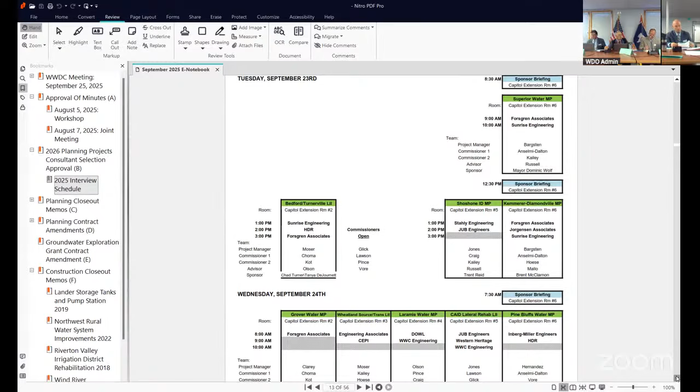Moving on to the Medicine Bow Water Master Plan. We have a motion for selection of the consultant. Mr. Chairman, Commissioner Lawson: the selection committee for the Medicine Bow Water Master Plan Level 1 project ranks the consulting firms interviewed in the following order: Sunrise Engineering, KL&A Incorporated, and the third one is Tri-Hydro. I, John Lawson, move the director to be instructed to begin contract negotiations with Sunrise Engineering for consulting services on the Medicine Bow Water Master Plan Level 1 project with a recommended appropriation of $174,000. Motion, do we have a second? Second. Motion made by Commissioner Lawson, seconded by Commissioner Glick. All in favor? Aye. Opposed?

Motion passes. Pine Bluffs Water Master Plan. We have a motion for a selection of consultant.

Mr. Chairman, the selection committee for the Pine Bluffs Water Master Plan Level 1 project ranks the consulting firms interviewed in the following order: HDR 1, IME 2. I, Ron Vore, move the director be instructed to begin contract negotiations with HDR for consulting services on the Pine Bluffs Water Master Plan Level 1 project with a recommended appropriation of $169,000.

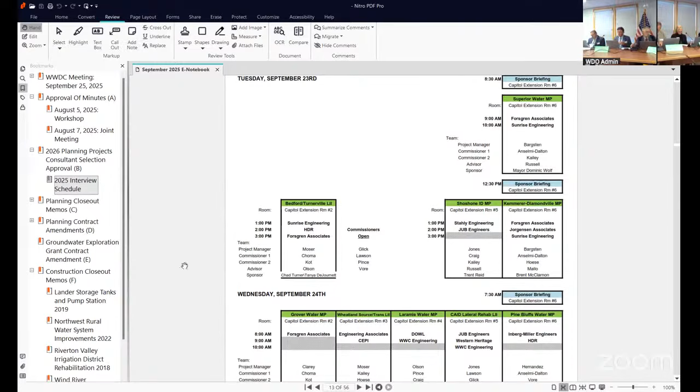Motion by Commissioner Vore, second by Commissioner Glick. All in favor? Aye. Opposed? That covers our consultant selection portion of the meeting. I'll turn it over to Director Mead.

Thank you, Mr. Chairman. Before we move on, I just want to express my appreciation to all the consulting firms that put in this year. Unfortunately, we can't give contracts to everybody, but it is a significant investment for those folks putting together proposals and preparing for interviews, so we do appreciate that. We've got a good group of good consultants in the state of Wyoming, so just want to express my appreciation for that.

Next agenda item is planning closeout memos. First one being Bairoil Master Plan, and we've got Keith Clarey to provide that for us.

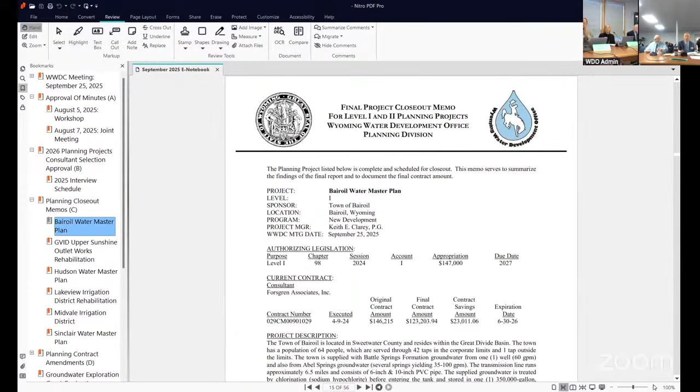Water Master Plan, level one study for the town of Bairoil, had an appropriation of $147,000. The original contract was $146,215. The final contract amount was $123,203.94. The contract savings amount was $23,011.06.

Town of Bairoil resides in Sweetwater County in the Great Divide Basin. It has a population of 64 with 43 taps. The system has springs about 6.5 miles northwest, which is their primary source of water. It gravity flows to town through a 6.5 mile pipeline, and it's treated for chlorine just before it enters the tank, a 350,000 gallon tank, which then supplies water to the town.

There's also a well northwest of the springs that they use occasionally, as a backup for the summer. In the wintertime, with the snow, both the springs and the well are inaccessible pretty much, depending on how much snow is up there.

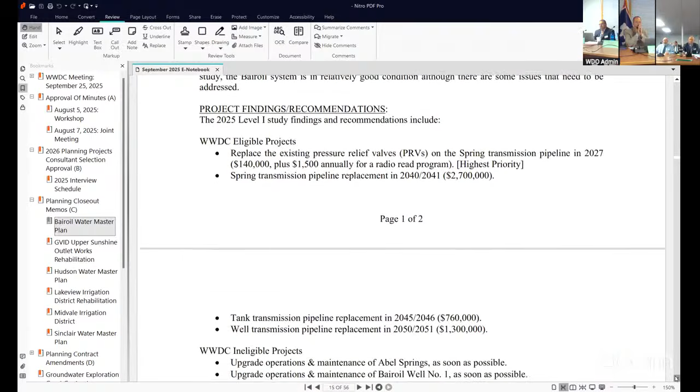The findings and recommendations for this master plan include a few items for eligible WWDC projects. The first and highest priority is replacing the pressure relief valves along the 6.5 mile pipeline, for a cost of about $140,000.

Beyond that, there's the spring transmission line, the tank transmission line, and the well transmission line, with prices ranging from $2.5 to $2.7 million for the spring transmission pipeline replacement in 2040 to 2041.

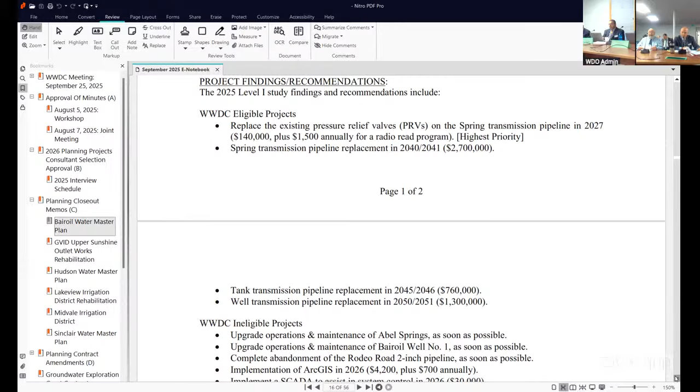The next item is the tank transmission line, at $760,000 in 2045-2046. Then a well transmission pipeline replacement in 2050-2051 for 1.3 million in today's dollars, but who knows what it will be in 2050.

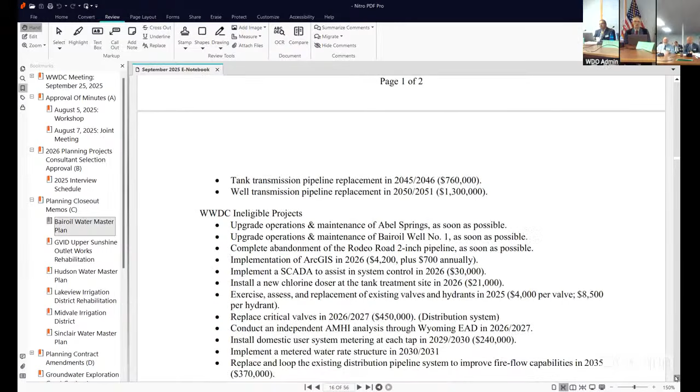There are also a dozen or so recommended projects not eligible for WWDC funding, primarily dealing with in-town distribution system items, and some operation and maintenance that needs to be critically taken care of. There's a public presentation on April 2nd at the Bairoil Town Hall.

The WWDO recommends acceptance of the final report submittals and closing the consultant services contract. The WWDO further recommends proceeding to the next level of project development upon submittal of an appropriate funding application by the sponsor. The town of Bairoil has not applied for additional WWDC funding at this time, but intends to apply sometime in the future for the selected alternatives.

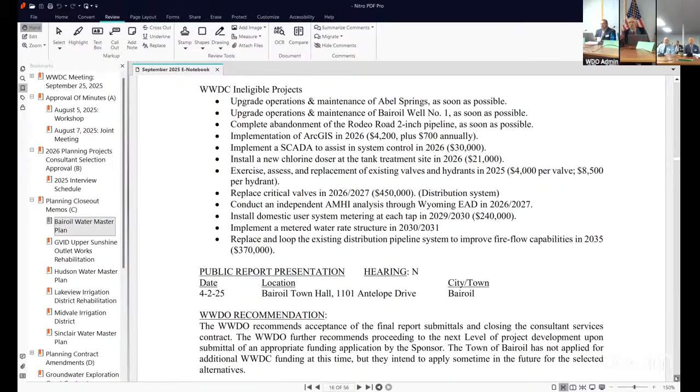Thank you, Keith. Anyone have any questions? This does not require commission action, is that correct?

Mr. Chairman, there is a motion. It does require commission action. At the end of each project closeout, there's a suggested motion for the commission.

Okay, Chairman, Commissioner Glick. I'd like to make a motion. I move acceptance of the Bairoil Water Master Plan Level 1 Study Project Report as being complete, and further, the Wyoming Water Development Commission makes the following findings relative to the project: that the commission recommend proceeding to the next level of project development upon the submittal of an appropriate funding application by the sponsor. We have a motion.

We have a second. Motion by Commissioner Glick, second by Commissioner Prince. All in favor? Aye. Opposed? Thank you, Keith. Thank you, Mr. Chairman.

Okay, Mr. Chairman, the next closeout memo is for the Greybull Valley Irrigation District Upper Sunshine Outlet Works Rehab, and we have Jennifer Russell from our construction department here to present that. Welcome, Jennifer. Morning. As Jason mentioned, I'm here to present the closeout memo for the Greybull Valley Upper Sunshine Outlet Works Rehab Level 2 study.

This was an appropriation from the 2023 session. It took a little more time than most projects due to the nature of the field work needed. The original contract amount was $620,828 and some cents. The final contract amount was $464,794.92, for a savings of a little over $156,000, which was a savings of about 25%.

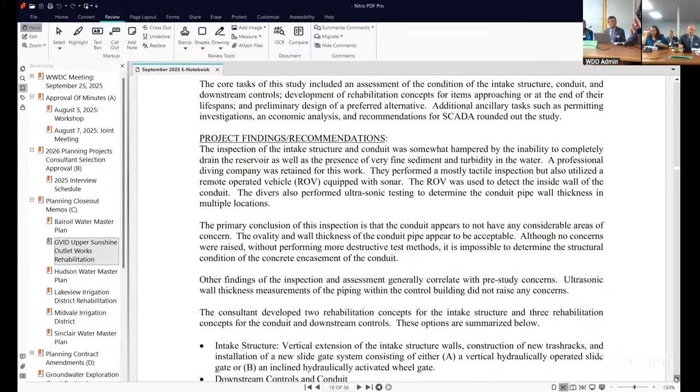Our recommendation is to accept the study that was done. We did have a public hearing. There was no opposition, and it was determined that the project functions and services cannot realistically be provided by any person, association, or corporation engaged in private enterprise. Therefore, we recommend proceeding to the next level of project development upon submittal of an appropriate funding application by the sponsor.

Mr. Chairman and Director, and so Jennifer, I hate to do this, but I have some concerns about this project.

First of all, I'd like to know, how many users are served by this and how many acres? I mean, we start at 2.6 million and then we get up to possibly 16 million. The last project, I kind of voted a soft no, just because in Bairoil, it's $93,750 potentially per person that lives there. We're getting to costs that are outrageous. At what point does it really serve the public interest is my question.

So maybe Jennifer, the director, or someone knows how many users, how many acre feet are stored. If we drain the dam, it's a big issue with Fontenelle, about the fish and wildlife, on and on we go. I'm just asking, this seems to be a pretty big merry-go-round we're getting on.

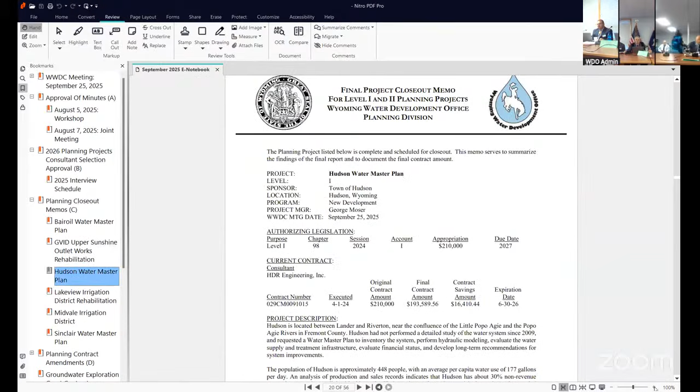Thank you, Mr. Chairman. The next project closeout is for the Hudson Water Master Plan. I'd invite George Moser up. Welcome, George. Good morning, Mr. Chair. Thank you. George Moser with the Water Development Office Planning Division. Today, for your consideration, is closing out a project for the Hudson Water Master Plan.

A memo summarizing that can be found on page 20 of your e-notebook PDF. This is a water master plan that was funded by the 2024 legislative session with an appropriation of $210,000. HDR Engineering was selected to perform the consulting services, and after final billing, we ended up with a project cost savings of about $16,400.

For those of you that don't know, Hudson is located just approximately between Lander and Riverton, kind of at the confluence of the Little Popo Agie and the Popo Agie, and they really had not had a study to look at much of their critical infrastructure in their system since about 2009. They have a population of a little less than 500 people. Average per capita water use floats in the high, 177 gallons per day per person.

Through the course of the study, we identified that they had about 30% non-revenue water. The reason I'm saying non-revenue is that probably fits into two different categories for Hudson. There's probably some actual leaks, but there's also some aging meters. The water that's actually being delivered just can't be accounted for and sold.

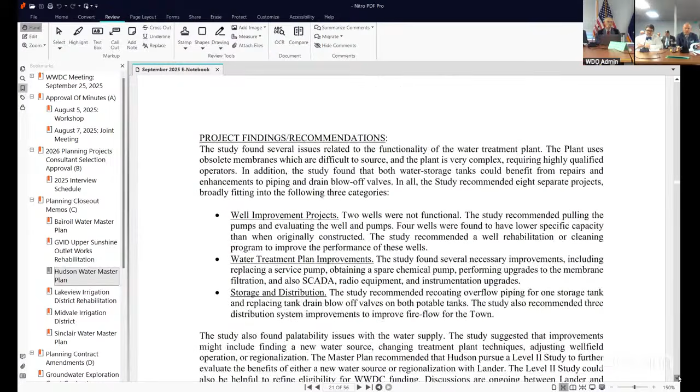The study really found several issues related to functionality of the water treatment plant, keeping in mind that under a level 1 water master plan, we can look at certain components of the water treatment. It may not be something ultimately that's eligible for funding or assistance on the construction side when we get there, but we do take a cursory look at those things.

One of the big things for their treatment plan is that it's really complex, and they do have proprietary membranes. So sourcing those membranes can be a problem for them. It takes a couple month delay. They've got to get them out of a manufacturer in Europe.

So one of the recommendations is, of course, to move to something more generic for them. Also, they have some corrosion of some valving in their water storage tanks, which is things that just as an O&M process they could upgrade and repair. So the study really identified 8 different projects of priority for Hudson. For your thoughts, I could put those into 3 broad categories.

Well improvement projects. They have a couple of wells that don't appear to be performing really at all. So the recommendation is to hire a pump servicing company to come in and take a look at those, see if they need to be rebuilt or replace what needs to happen there in order to improve the functionality. Also probably look at rehabilitating some of those wells. We noticed during measuring water level changes during pump cycles that some of those wells are not as efficient as they were when they were originally completed. So probably think about some rehabilitation techniques on some of those to improve their performance.

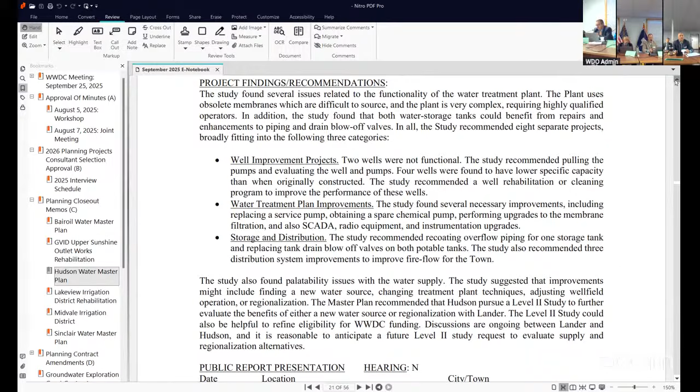We have a motion. Do I have a second? Second. Motion by Commissioner Glick, second by Commissioner Choma. All in favor? Aye. Opposed? Motion passes. Thank you.

Mr. Chairman, I might also mention too, we just started the Middle Popo Agie Level 2 feasibility study looking at potential for more storage up in the Middle Popo Agie drainage, and that the, I guess, regionalization concept is also being thought about in that study as well, because we're looking for late season supplemental irrigation water, but also potential future water use needs from the municipalities of mainly Lander.

But as George mentioned from that master plan, there's been some thought given to what areas of either Lander that are kind of rural sprawl or these close towns nearby that could be brought in the regional system. So hopefully we'll be able to provide some additional information if they come in the spring for a level 2 feasibility study.

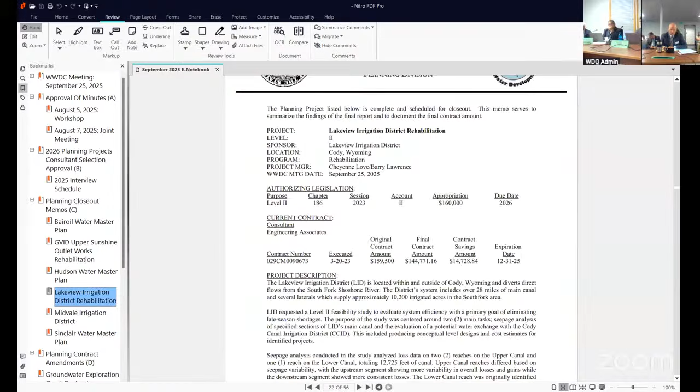All right, so the next closeout memo is the Lakeview Irrigation District Rehab Level 2 study, and we have Cheyenne Love to present that.

You have to push it. I press it. Okay, we are on page 22.

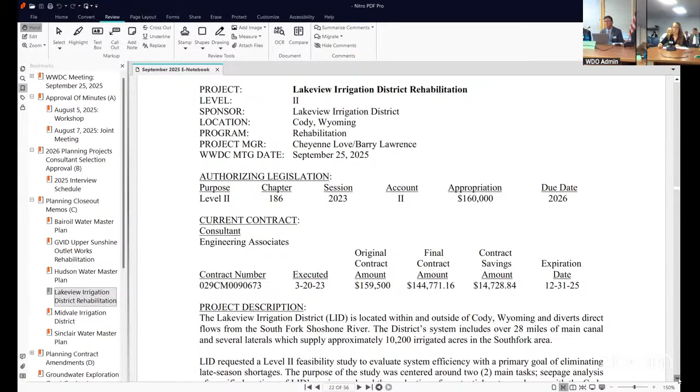The appropriation for this project was $160,000 under the 2023 legislative session. Consultant was Engineering Associates. The contract amount was $159,500. Following the final pay request, the contract savings was $14,728.84.

The main goal of this study was to evaluate system efficiency with the primary goal of eliminating late season shortages within the Lakeview Irrigation District. That was completed under two main tasks: a seepage analysis and analyzing potential for water exchange with the Cody Canal Irrigation District. The seepage analysis was conducted on two reaches on the upper canal and one reach on the lower canal, all showing differing variability in the seepage loss.

Multiple conveyance routing alternatives were considered as options for that water exchange with Cody Canal. The Coons lateral was identified as being the most feasible, however the consultant acknowledged there would be pretty high infrastructure costs associated in developing that lateral for exchange purposes. So this study looked at multiple improvement options to address the seepage loss within those focus areas, those reaches identified, as well as assessing the feasibility for that interdistrict water exchange between Lakeview and Cody Canal.

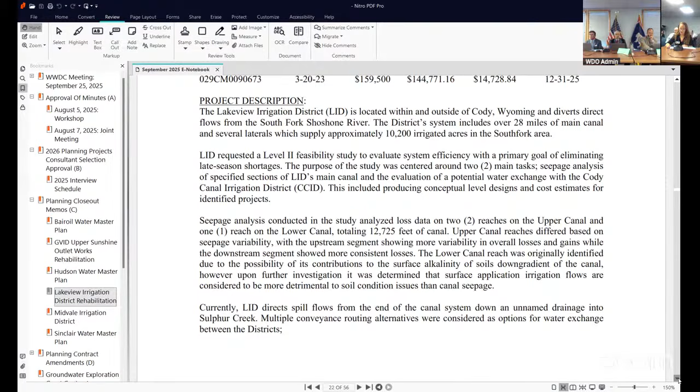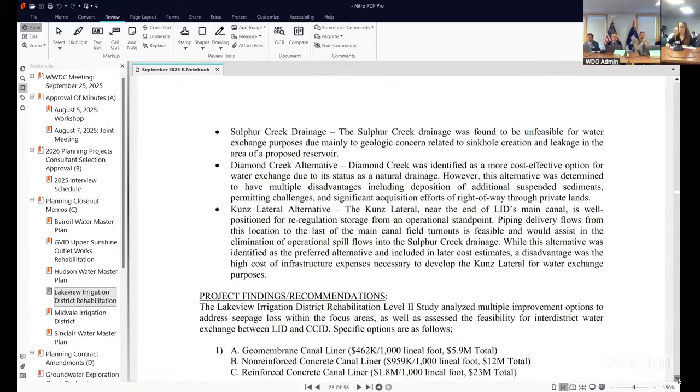The options considered were as follows: geomembrane canal liner, non-reinforced concrete canal liner, and reinforced concrete canal liners, all with differing costs associated with lining those seepage areas. Also the exchange storage and pipeline, which was identified as the Kunz lateral. That cost total is for the Kunz lateral alternative.

There was a public hearing held on July 14th at the Park County Library in Cody. The recommendation from the office is acceptance of the final report submittals and closing of the consultant services contract. On the bottom of that second page, there's a motion for your consideration, and I'd be happy to stand for any questions.

Hearing none, can we have a motion? Commissioner Glick? I'd like to make the motion. Oh, hold on, my card fell. Gotta make sure everybody knows who I am.

The Lakeview Irrigation District Rehabilitation Level 2 study analyzed multiple improvement options to address seepage loss within the focus areas, as well as assess the feasibility for interdistrict water exchange between LID and CCID. Specific options are as follows.

Mr. Chairman, Director, you might be reading the wrong part. Yep, I am reading wrong. Okay, right, sorry, give me a break.

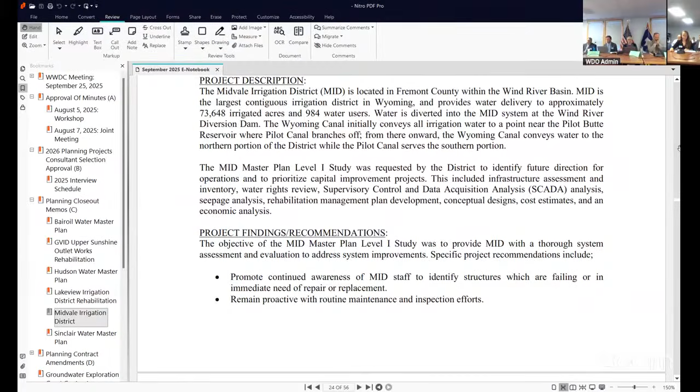The appropriation for this project was $409,000. Consultant was Tri-Hydro Corporation. Contract amount was again $409,000. Following the final pay request, the savings for that project was $44.28. The study goals were to identify the future direction for operations for the Midvale Irrigation District and prioritize capital improvement projects. This included inventory, SCADA analysis, the rehab and management plan, and then cost estimates.

Recommendations under this study primarily focused on the district remaining proactive in project implementation. They're pretty active with that in between these master plans, so they mainly boiled down to keeping that going. The specific projects could be placed under four categories, which you can see there.

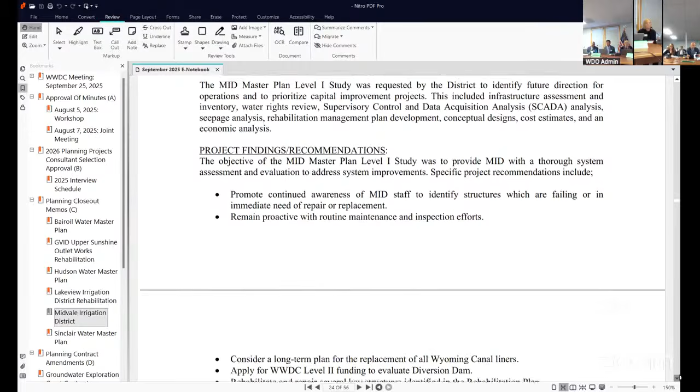Structure, rehabilitation, and replacement components. There were 50 structures identified for replacement or rehab under this study, totaling close to $28 million.

SCADA improvement components: there were 16 existing site and 4 new site SCADA improvements identified, for about $562,000. Canal and lateral improvement components: 9 ditch-to-pipe conversion projects and 4 canal lining projects were identified for rehab.

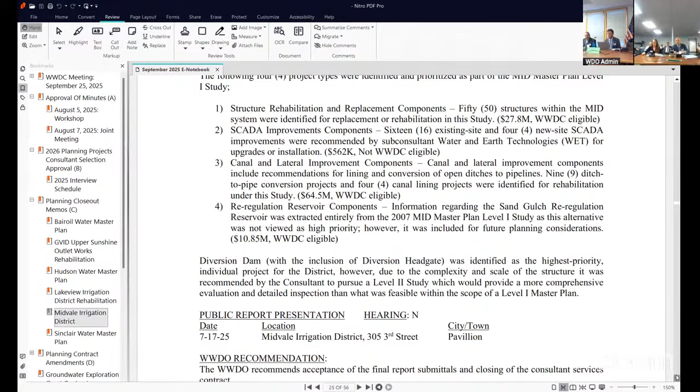Totaling almost $65 million. Then the re-regulation reservoir component: the Sand Gulch re-regulation reservoir was mainly looked at, extrapolated out from the 2007 study that was conducted for Midvale.

The district wasn't looking to pursue that at this point in time, but they wanted to keep the option on the table in case they wanted to look at that in the future. Extrapolated out to 2025 costs, Tri-Hydro estimated that at almost $11 million.

The diversion dam, with the inclusion of diversion headgate, was identified as the highest priority individual project for the district. But due to the complexity and scale of that structure, it was the recommendation of the consultant for the district to pursue a level 2 study for diversion dams specifically, which I think the district is interested in and will be looking at pursuing that work in the near future.

There was a public report presentation, not a hearing, on July 17th at Midvale Irrigation District. The recommendation is to approve acceptance of final report submittals and closing of the consultant services contract. There's a proposed motion for your consideration, and I'd stand for any questions.

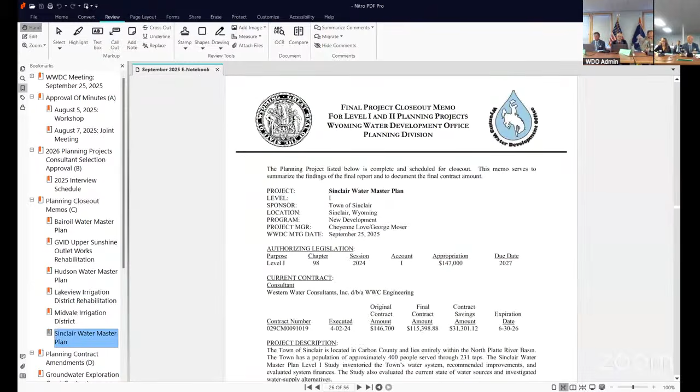Okay, great, so last closeout memo from me this morning. Director Meade said this is for the Sinclair Water Master Plan Level 1 study. This can be found on page 26 of the e-notebook. The town of Sinclair serves approximately 400 people through 231 taps.

The town receives treated water supplied by the city of Rawlins under a joint powers agreement that was entered into in 2002. The system consists of a 500,000 gallon storage tank supplying one distribution pressure zone.

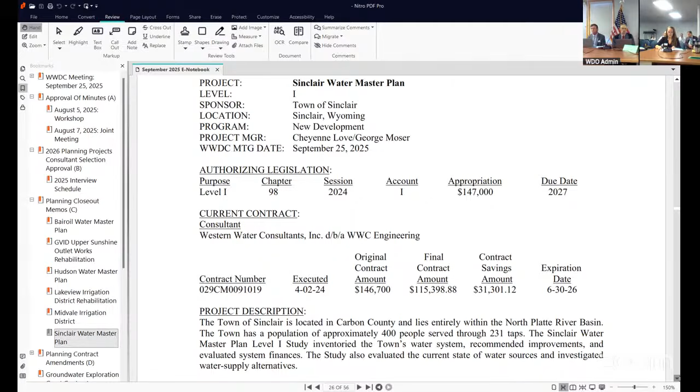The appropriation for this project was $147,000. The consultant selected was Western Water Consultants Incorporated. Contract amount was $146,700. Following the final pay request, the savings was $31,301.12.

The study's goals were to inventory the town system, recommend improvements, and evaluate system finances. This included evaluating the current state of water sources and then investigating water supply alternatives for the town.

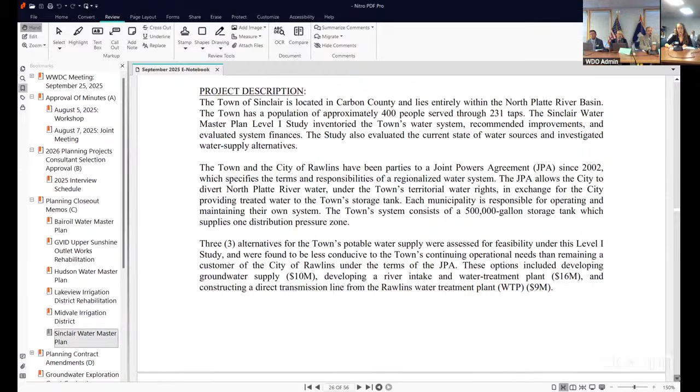Those water supply alternatives under this study were determined to be the development of a groundwater supply for the town at about $10 million, the development of a river supply, which would include an intake and a new water treatment plant at $16 million, and the third being construction of a direct transmission line from the Rawlins water treatment plant back to the town, which was the lowest cost at $9 million.

However, it was recommended by the consultant that the most cost-effective and feasible option for the town would be to remain a customer of the city of Rawlins in the water exchange.

There was an acoustic leak survey conducted. Only one isolated suspected leak was found on the water main, and that was included under the project recommendations for the town. The hydraulic model showed that the town was compliant with regulations and fire flows, but there are water age concerns regarding the storage tank and the water held there.

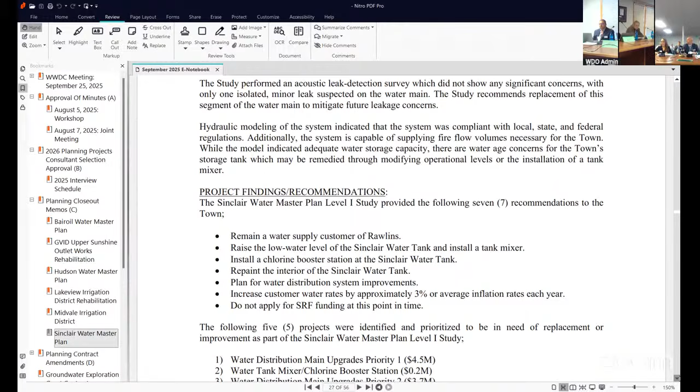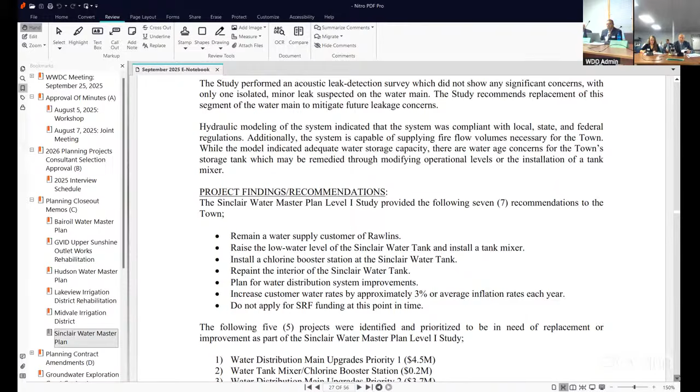So the projects for replacement and improvement were the five you can see there: water main upgrades priority 1, which included the segment where the small leak was detected, and a water tank mixer and chlorine booster station, which were meant to help with the water age concerns in the town.

Water main upgrades priority 2 addressed another segment of Sinclair's water mains identified as needing upgrade, along with a water tank repaint and a water meter replacement.

The total project cost for all of those together is roughly $9 million, and they're not considered WWDC eligible, so that would require outside funding sources, which the consultant helped the town identify.

There was a public report presentation on July 9th at Sinclair Town Hall. The recommendation is to accept the final report submittals and close the contract. There's a proposed motion for your consideration, and I would be happy to stand for any questions. Anyone have any questions?

We have a motion. Mr. Chairman, Commissioner Choma: I move acceptance of the Sinclair Water Master Plan Level 1 Study Project Report as being complete, and further, the WWDC makes the following findings relative to this project: that the commission recommend terminating further consideration of the proposed project. Do we have a second?

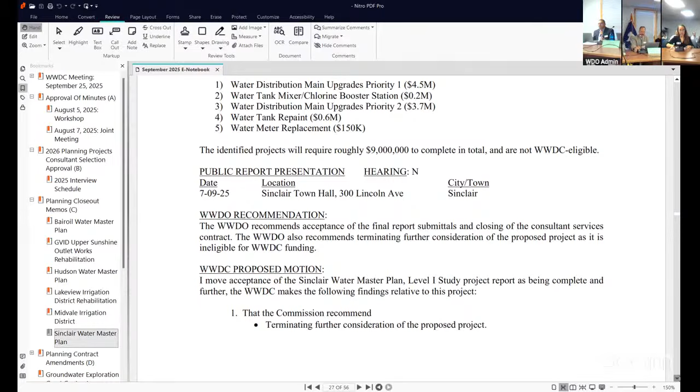Motion by Commissioner Choma, second by Commissioner Lawson. All in favor? Aye. Opposed? Motion passes. Thank you.

All right, thank you, Mr. Chairman. The next item is planning contract amendments. The first one is Clear Creek Storage Level 2 Phase 2.

This is amendment number 9 to the contract with Stantec Consulting Services. We're basically looking to extend this by an additional 6 months. This project's been languishing for some time. It is a fairly expensive project.

The Upper Bull Creek Reservoir site has been identified as a preferred alternative moving forward, but it's a $100+ million project.

Several years ago, we were hopeful that some of the Water Resource Development Act language was going to lend itself to the state of Wyoming being able to get some federal funds for reservoirs. That passed, but no funding was ever put in place for that particular program through the Corps of Engineers.

So with the new administration and some of the funding we've used on other projects, NRCS watershed and flood prevention operations might be an opportunity.

And I think there's some things with the new administration coming out on how much more funding will be coming into those programs. So really just wanting a little bit of additional time, wanting to wrap this up, but to understand what other funding sources are out there, circle back with the potential beneficiaries and future sponsors, and put a bow on this thing and figure out how we're going to move forward, what's feasible, and who's going to be the group that's going to move forward with it if they so choose.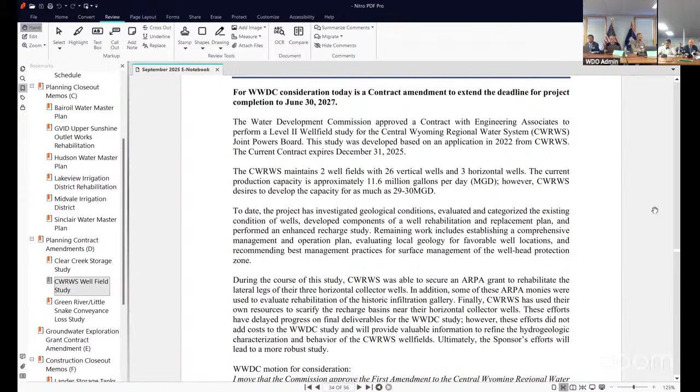So what we are proposing today is to extend the current contract. It currently expires December 31st, 2025. We would like to add a couple of years to that. June 30th, 2027 is what we are proposing. And if there are any specific questions for the sponsor, I believe Ethan Yonker is online. The consultant for this planning project is Engineering Associates, and Dave Engels is the project manager. I believe he is also online. I suspect between the three of us, we could try to answer any question that the commission might have.

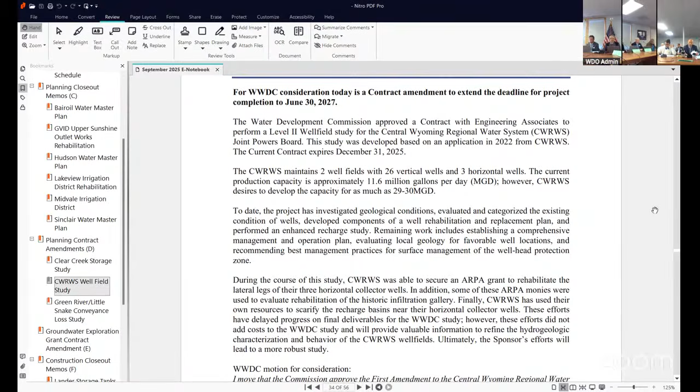If you are interested, there is a proposed motion on the bottom of the memo page on page 34. Anyone have any questions? We have a motion.

Mr. Chair. Mr. Cayley. I move that the commission approve the First Amendment to the Central Wyoming Regional Water System Wellfield Level 2 study to extend the contract to June 30th, 2027.

Motion by Commissioner Cayley, second by Commissioner Anselmi Dalton. All in favor? Opposed? Motion passes.

Thank you, Mr. Chairman. The third and last planning amendment would be on the Green River, Little Snake River Basin's conveyance loss study. I'd ask Chase to come up and give a brief explanation on that.

Mr. Chair, Commission, good morning. This amendment is an extension of time from December 31st, 2025 to December 31st of 2026. The original schedule was expedited, and a big piece of the conveyance loss study is the measurement of flows upstream and downstream in a canal to determine the conveyance losses through seepage, for example. It was an unanticipated difficult time to get landowner participation and access to find ditches throughout the Green River Basin that were representative of the basin.

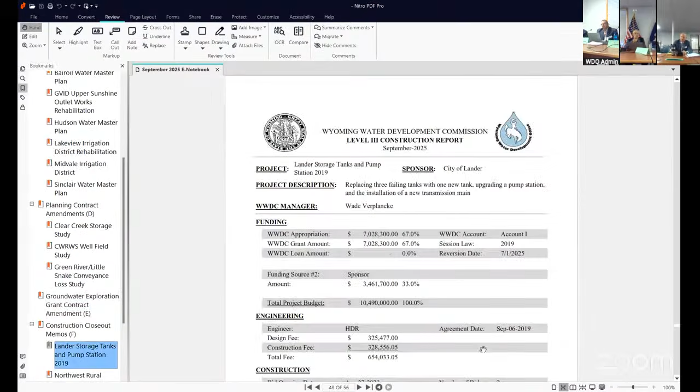Chairman, Commission, Bill Brewer, Deputy Director of Construction, here with some closeout memos. We're going to be coming forward to you a bunch with closeout memos as we're getting some construction projects finished up, and some of these are fairly old ones that we're wrapping up.

Post-COVID, we had a really good period for a short time where we got some incredible bids, and then our bids went ridiculous and we postponed a lot of projects. But we're moving along. This summer has been very busy for the construction staff, with multiple projects being awarded this year and moving forward to close out.

So let's get started. The first project here is the Lander Storage Tanks and Pump Station, for the city of Lander. Basically this project replaced 3 failing tanks with 1 new large tank and upgraded their pump station and installed a new transmission main to make this whole system work within their system.

This was originally a 67% grant project because this is from 2019, with the sponsor covering 33% of the costs. The engineering firm hired was HDR. They came in a little over $654,000 to complete the engineering and construction management on this project.

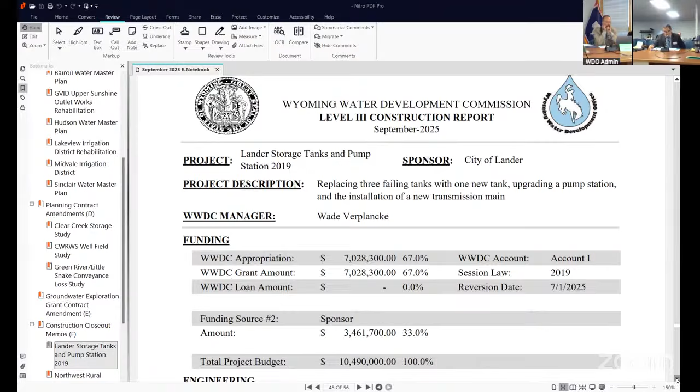Just shy of 6.8 million came from the commission, and we'll be looking at reverting just under $229,000 to account one from this project. So overall, the project was kind of slow and delayed, but in the end ended up being a good project, coming in slightly under budget.

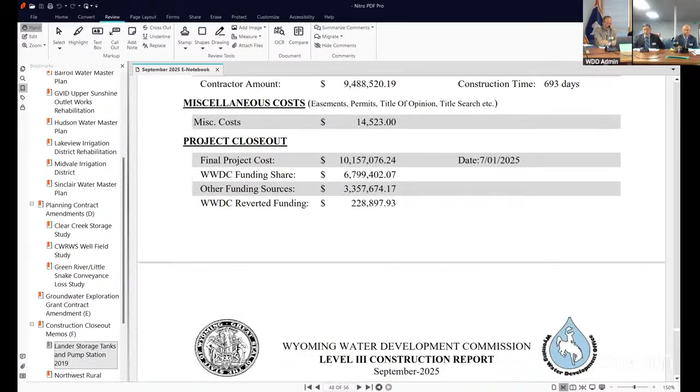Any questions on Lander? Have any questions for Bill on this, Chairman? Commissioner Lick?

Thanks, Bill, for all your help on that. I just want to give everybody a little information. Back when we were trying to get this project started, the roof on the old tanks was getting ready to fail and cave in. We had a bad winter, it was going to cave in, but luckily it didn't. We had a fairly mild winter, which really helped us out.

The tanks and water line improvement for the pumping station was really critical for our area, because this is where our hospital gets its water. And if the tank had failed, we would have been out of hospital service or anything else. So just thanks to everybody. Thank you.

Thank you, Commissioner. Anyone else have any questions or comments for Bill?

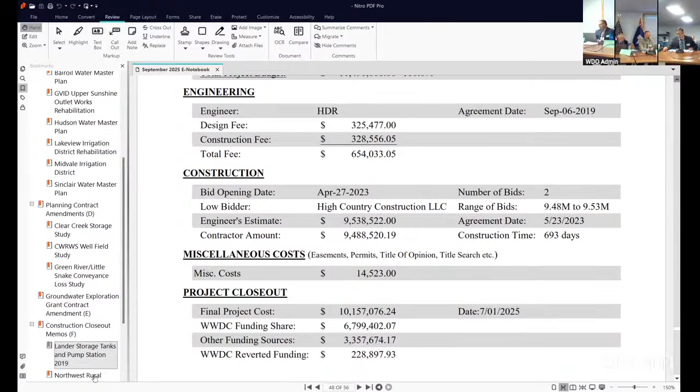Okay, thank you, Bill. So we'll move on to the Northwest Rural Water System Improvements 2022 project. This was for the Northwest Rural Water District, and it was a tank installation. Essentially, this installed 3 smaller tanks to the system to aid flows within a portion of the system.

Northwest Rural Water has been doing this throughout their system, where they install these small tanks in certain areas because there's such a large area up there that they cover. They strategically place smaller tanks in different areas to make sure the flow works within their system. So this one was completed. The original appropriation on this project was...

$884,400 at a 67% grant, and this was also account one funds. In the end, the cost of this project did go up. However, the sponsor received a second appropriation from sponsor's contingency funds.

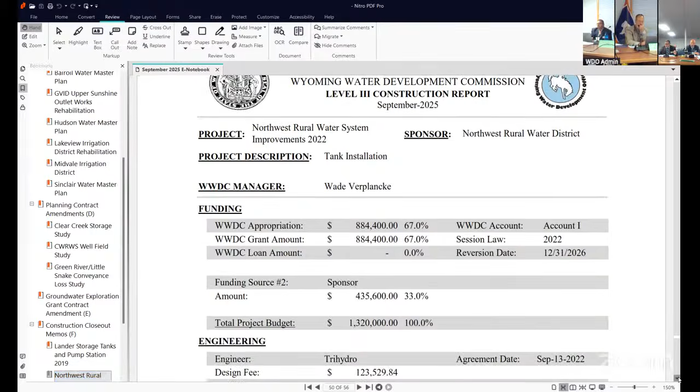So the original, I should go back - the original legislation was a little over 700,000. There was an additional 184,000 of sponsor's contingency funds added, and the sponsor also received some ARPA funds through the SLIB office. So in the end, this project ended up about 53% funded from water development and about 46.8% funded by other funds.

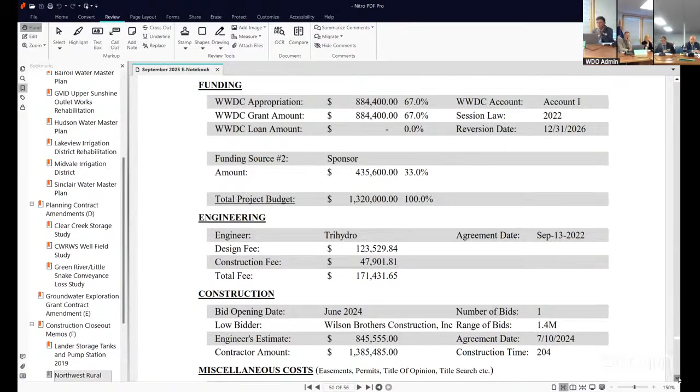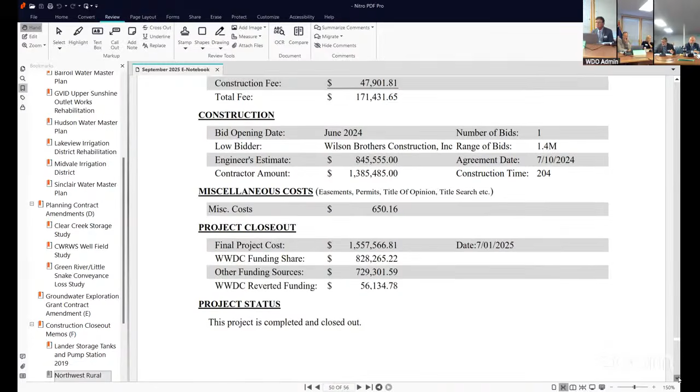Trihydro was the engineer, their total fees came in about $171,000 for their work. Wilson Brothers Construction was the ultimate winner. Again, only one bid was received, which is partially the reason for the increased cost on this project.

So the contract amount was above the engineer's original estimate, and that was covered by both sponsor's contingency funds and ARPA funds through SLIB. In the end, the total project ended up at $1.56 million. WWDC's share was a little over $828,000, representing 53.2% of the project. In the end, we'll be reverting about $56,000 to account one sponsor's contingency funds.

Thank you, Bill. Anyone have any questions for Bill?

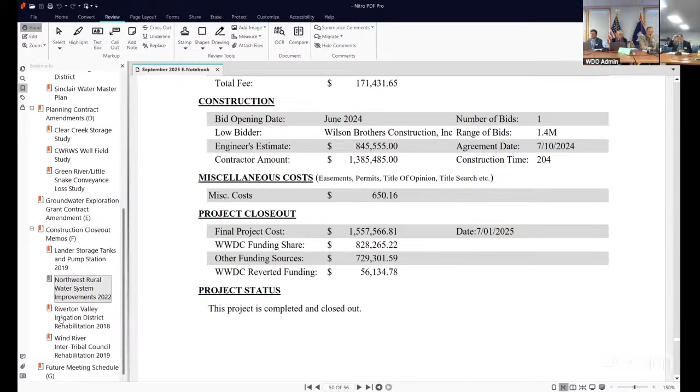Okay, go ahead and move on. Good, thank you. So we're going to move on to the Riverton Valley Irrigation District Rehab 2018 project.

This was rehab work done due to a flood that occurred and basically took out one of their large canals, with some disturbance along the river. This project was a 25% grant, matching federal funds of 75%, to do some rehab work on the canal and some vegetation and erosion control features following that flood. So a little different project than we would normally run.

Sage Civil Engineering was the engineer for the project. Their final costs were a little over $126,000.

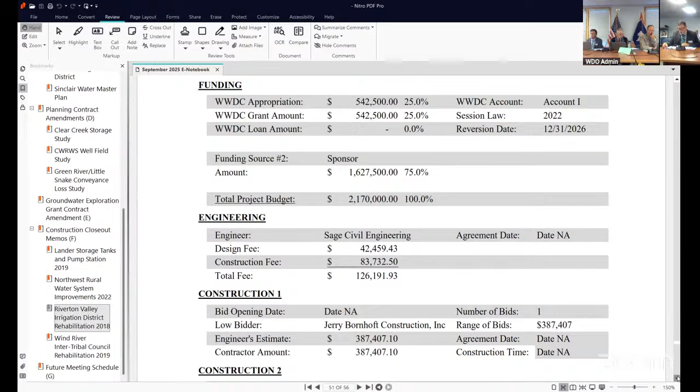We had 3 different portions of the construction project completed, and we didn't have a real good engineer's estimate on those. They basically just went out to bid for the different portions that needed to be repaired. So it shows up kind of that the engineer's estimate and the cost was the same, because there was never really a true engineer's estimate on this one, on what these costs would be. But the work was finally completed and rehabilitated.

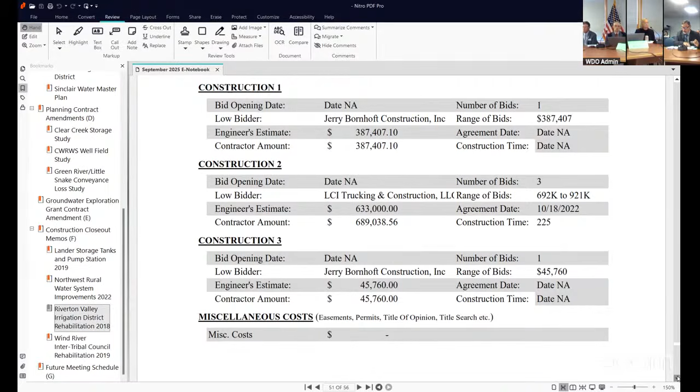Final project cost was about 1.25 million. The water development funding provided was a little over $312,000, and we will be reverting $230,400 to account 1 for this project. So the project is closed out at this point.

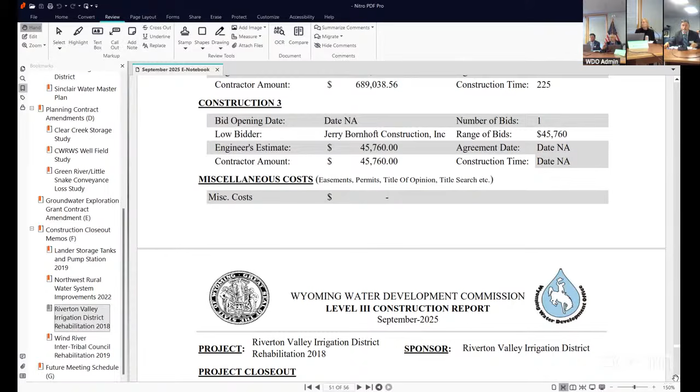Thank you, Bill. Anyone have any questions or comments regarding the Riverton Valley Irrigation District rehab? Okay, Bill. Okay, we'll move on to the final closeout memo.

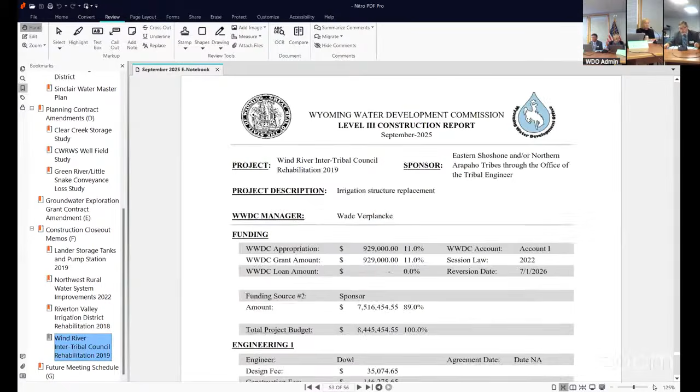This was for the Wind River Intertribal Council Rehabilitation 2019 project. The sponsors were kind of a combined Eastern Shoshone and Northern Arapaho tribes through the Office of the Tribal Engineer that manages this. This project replaced 3 structures within the irrigation system - not that this means much to anybody, but it replaced structures 10C, 37C, and 14B-44.

Overall, this project kind of went out of control on costs. Some of that was, had a lot of problems with getting contractors to bid the projects. So several of the projects were rebid several times, often receiving only 1 bid even after multiple bids. In the end, the Bureau of Indian Affairs said they would cover the additional costs, so the project moved forward.

So in the end, Water Development Commission's funds were dropped down to 11% of the total project. So we essentially used up all the funds, but only at 11% of the project costs. $929,000 was originally appropriated, and the sponsor obtained about $7.5 million in matching funds to go with that.